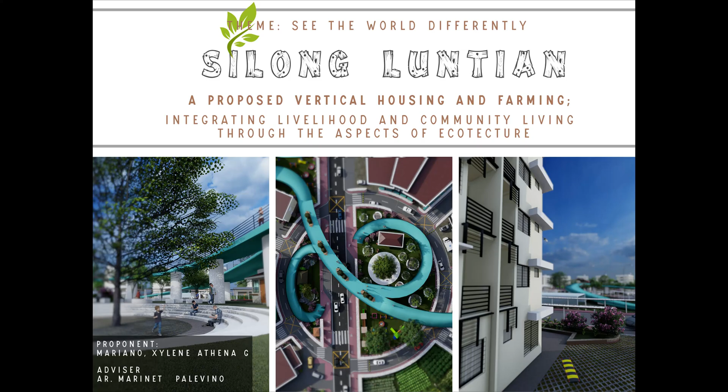Good day, I am Xylene Athena Mariano, here to talk about my proposal entitled Silong Luntian.

A proposed vertical housing and farming, integrating livelihood and community living through the aspects of ecotecture. The name itself, Silong, refers to the shade that safeguards anything underneath it, combined with the term Luntian, meaning the color green that is often associated with nature. When put together, these two words form Silong Luntian, a place that can provide people with their basic needs, all while being harmonious with nature.

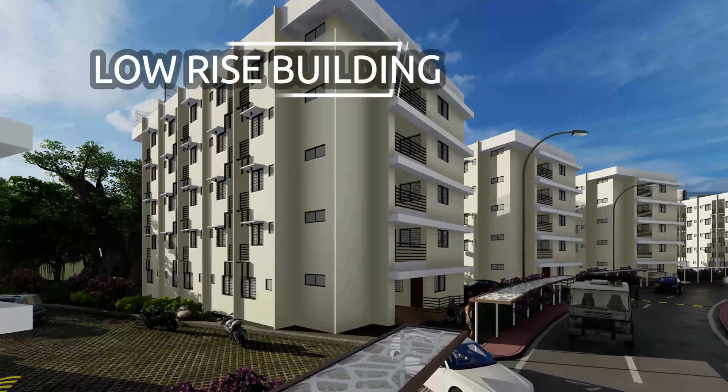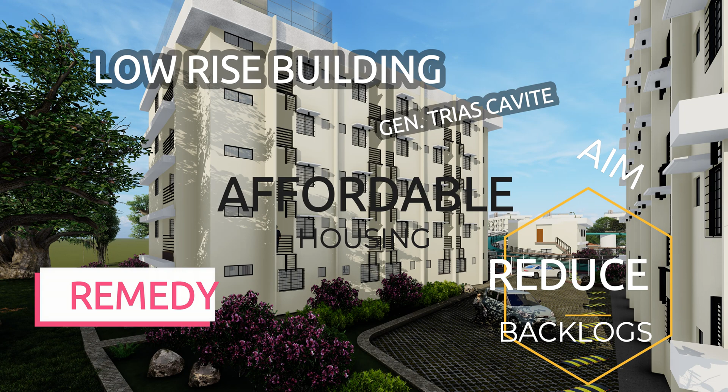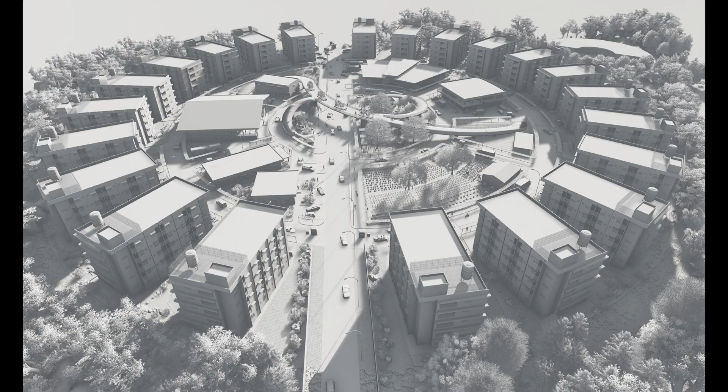To start off, the project is a low-rise building or LRB housing situated in General Trias, Cavite. The proposed project, with the aim of providing affordable housing, can also be seen as a remedy to reduce housing backlog since 25% of the total needs are accounted for the socialized housing segment according to the Board of Investments. This proposal intends to showcase green spaces such as parks and playground, a place for growing crops, and a marketplace to sell their goods, but most importantly, a residential living space to sustain people's housing needs.

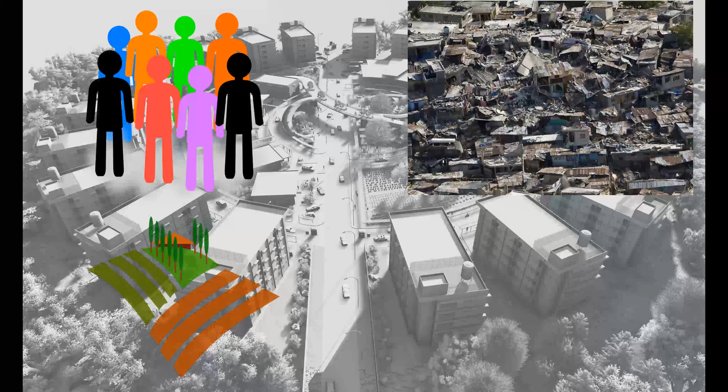Housing, as one of the basic needs, along with food and water, has been one of the most expressed needs and aspirations of the people, especially the urban poor and those belonging to the low-income group. These are some of the major existing problems: rapid population growth, presence of informal settlers, also the conversion of agricultural land, and the unmet housing needs.

As a solution, the project aims to achieve an architecture that gives back more than it takes, that defines home as both shelter and food, while providing quality and affordable housing. This project aims to provide not only the basic needs of the people, such as shelter and food, but it can also provide them jobs while increasing General Trias' economy.

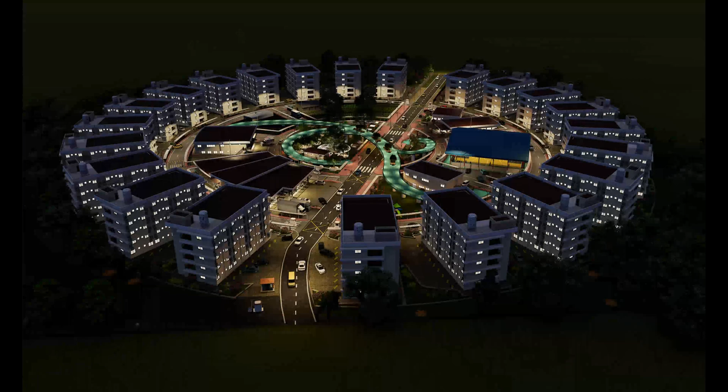To make this project achievable, we have NHA as the client that can support us financially. NHA is the sole national agency mandated to engage in housing production for low-income families. The project is said to be a residential facility that will build an ideal neighborhood and was proposed based on the project objectives and the needs of the client.

The scope includes providing a socialized housing that uses innovative architectural approach that are in line with the BP 220 IRR while optimizing the space and budget for the housing project, and also to provide community facilities as required by the NHA. When it comes to the limitations, the project will be focused on providing the housing needs of the lowest 30% of the urban population to avoid monopolizing.

The target market users are ISFs, or low-income families. Budget restrictions are also one of the limitations of the project.

The site is an 8.2-hectare land with a minor road along the middle part of the site. It is surrounded by residential areas on all sides. The minor road is an advantage for direct access to the site.

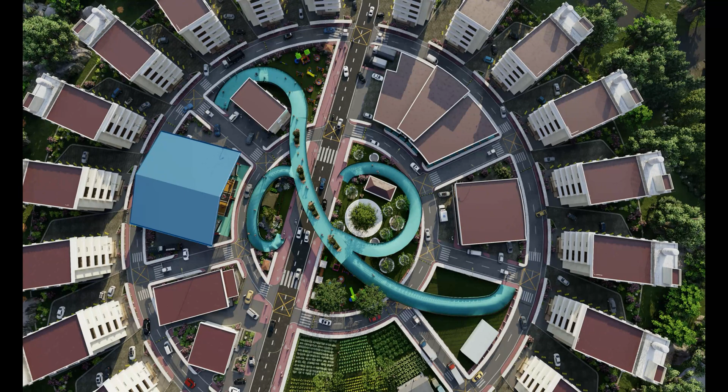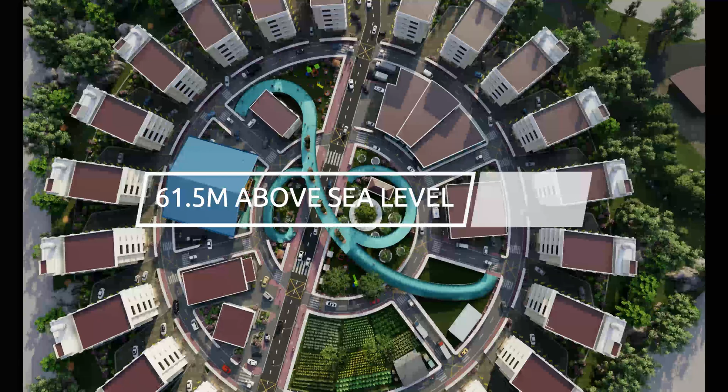Going to the SWOT analysis, these are the strengths. The site is located in a southern mixed-use development zone near the Golden Gate Business Park. High in elevation and no recorded flood. Bagong Calzada Road giving direct access on the site. Good type of soil. It also has drainage and a good climate, and it's also surrounded by residential areas.

About weaknesses, there is no scenic view, point-to-point tricycle route, noise and air pollution along the Bagong Calzada Road. Strategies are provisions of more suited vegetation for the noise pollution that serves as a buffer and for the scenic view.

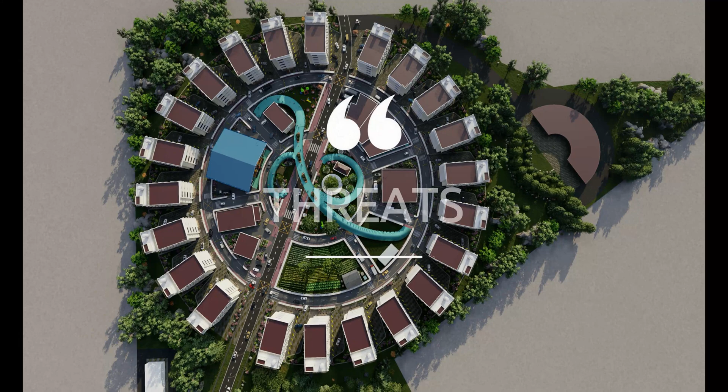Opportunities will bring livability to the market and business. Companies often choose new residential clusters for job opportunities. Good type of soil suitable for agricultural crops. For the threats, competitions from other subdivisions in the vicinity. Strategize a sustainable and innovative facility that is advantageous compared to other residential areas nearby.

These are the building systems applied in the project. For the environmental systems, we have passive cooling, daylighting, and rainwater harvesting. For the structural systems, flat slab construction, in which the absence of beams can reduce the building height, thus lowering the construction cost, all while having a higher ceiling, promoting good air circulation inside the units.

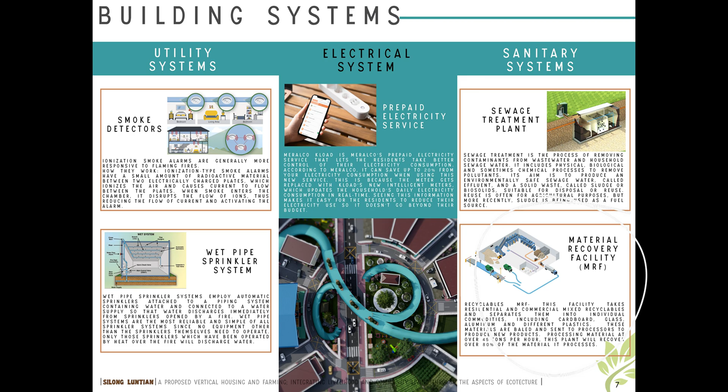For the utility system, smoke detectors and wet pipe sprinkler system is applied. For the electrical systems, prepaid electricity service. For the sanitary systems, sewage treatment plant and material recovery facility are included. For landscape systems, green pavement and urban farming.

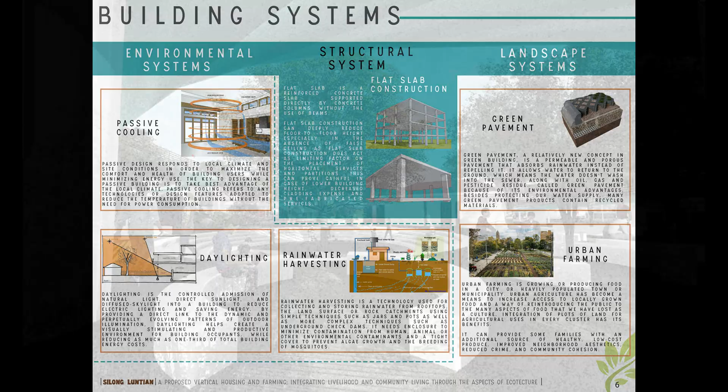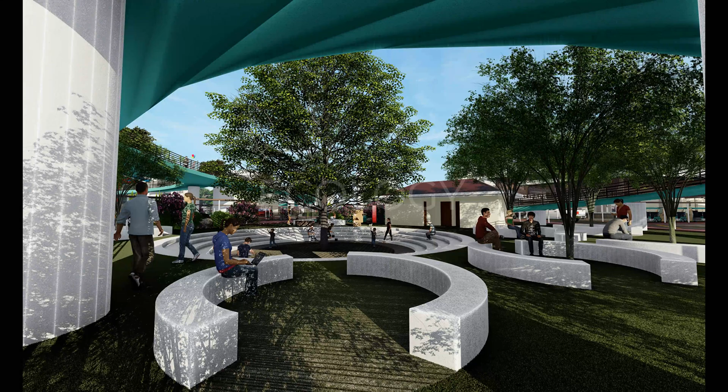The design concept used is ecotecture, based on the principle of not harming the environment. The word ecotecture is a combination of ecology, meaning the totality of relations between living organisms and their environment, and architecture. Ecotecture helps people and nature live harmoniously and support each other. Nature contributes to the beauty of architecture, and the architecture glorifies the majestic beauty of nature.

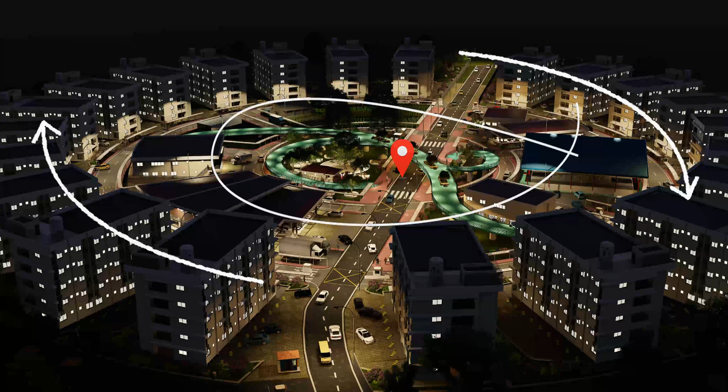The planning concept applied on the site is the idea of the neighborhood unit by Clarence Perry, based on the simple principle that one is planning for society. It promotes a community-centric lifestyle by putting the community center at the inner core, while the residential area surrounds it, giving equal access to all the neighborhood unit. It also promotes a walkable and safe community by having most of the necessities inside the community rather than going outside of it.

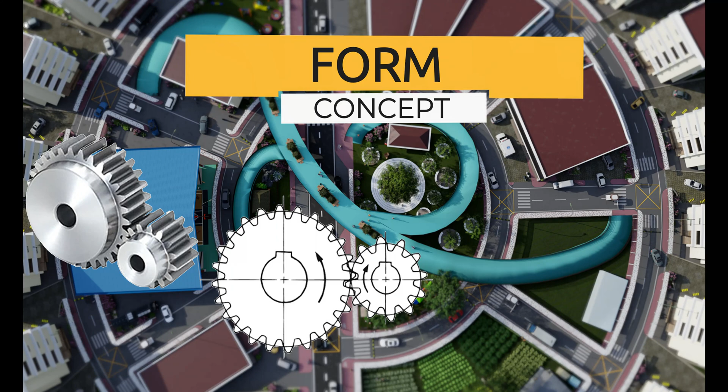The form concept applied is a gear. A gear cannot function alone, just like how everything inside the community is essential, and the people themselves are needed for it to operate, thus making the community sustainable.

The designer believes in the saying of Philip Cortelyou Johnson: 'All architecture is shelter. All great architecture is the design of space that contains, cuddles, exalts, or stimulates the person in that space.' To further explain, one can easily create a shelter, but to make it greater, it has to make you feel something, may it be excitement, comfort, or anything.

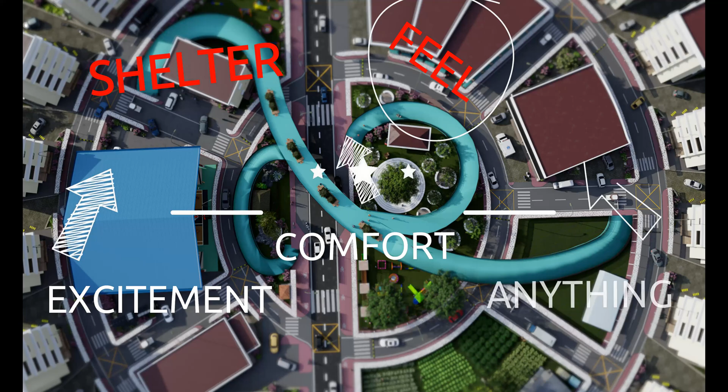Here are the set of design considerations applied.

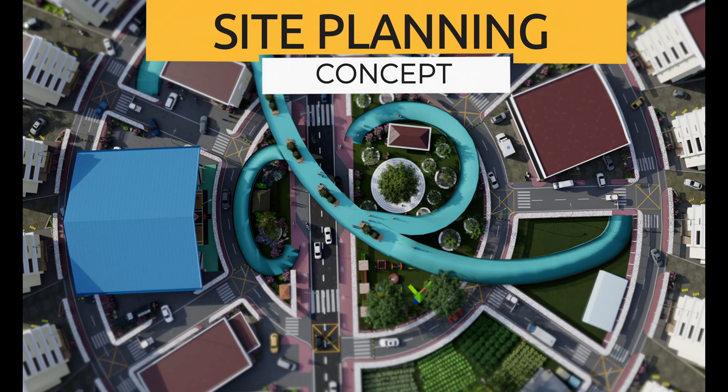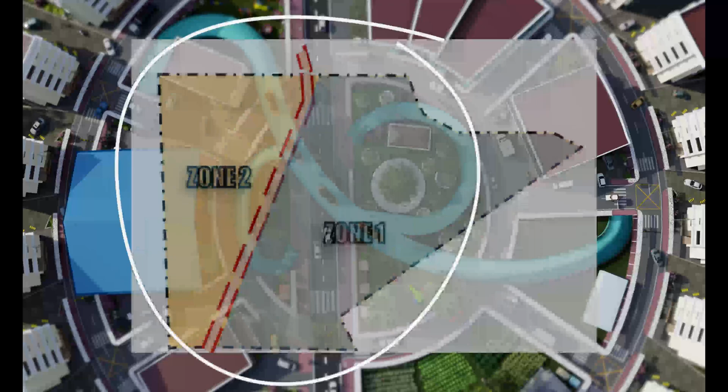These are the steps on how the project is planned on-site. First is considering the best orientation of the project from the behavior present in the site. Next is defining the main possible entry. After the possible entry, allocating the zoning and layout of major spaces.

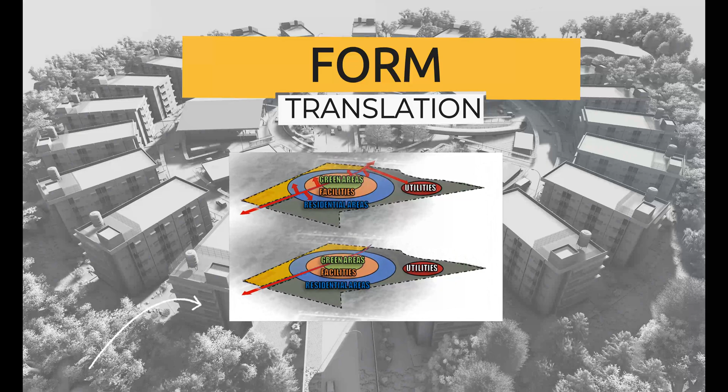Right after the analysis of the building, zones, and layout of major spaces, the massing of the project shall now be ready for translation. Form translation starts on layouting and allocating zones. Next is the allocation of pedestrian circulation, including road networks. Next is analyzing the sun and wind orientation.

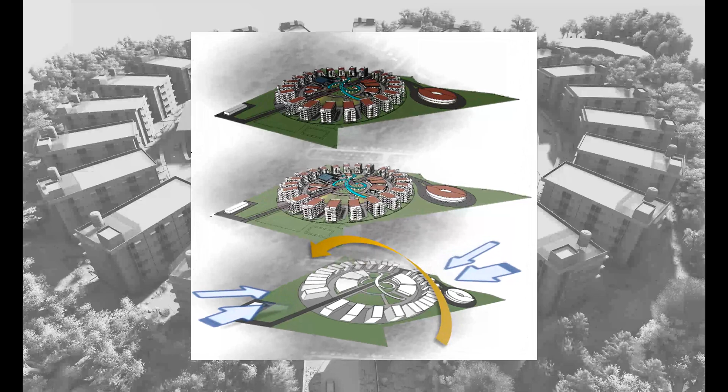After considering the circulation and the sun-wind orientation, the development phase is ready. Next is designing the entire site development, and lastly is the finished model, detailed site development.

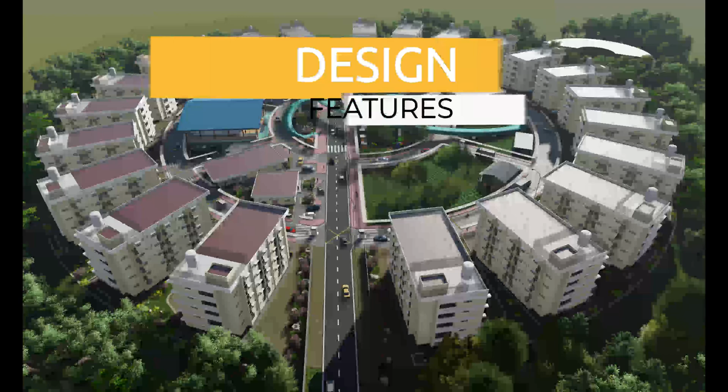These will be the design features of the project. Starting from the architectural character, the designer uses minimalism, which promotes clean geometric horizontal and vertical lines, uniformity, depth, and visual interest with asymmetry and color. Minimalist home exterior aims to create a visually uncomplicated home.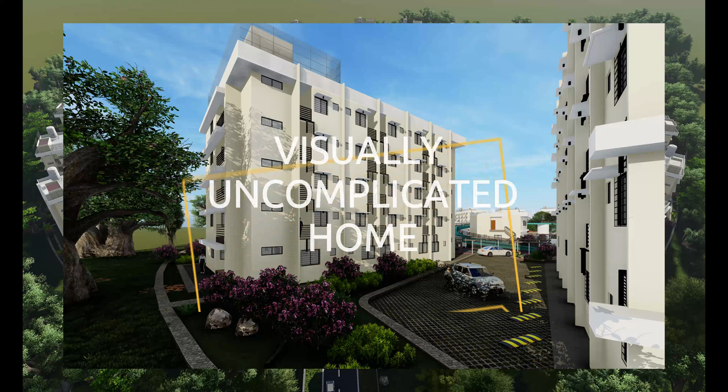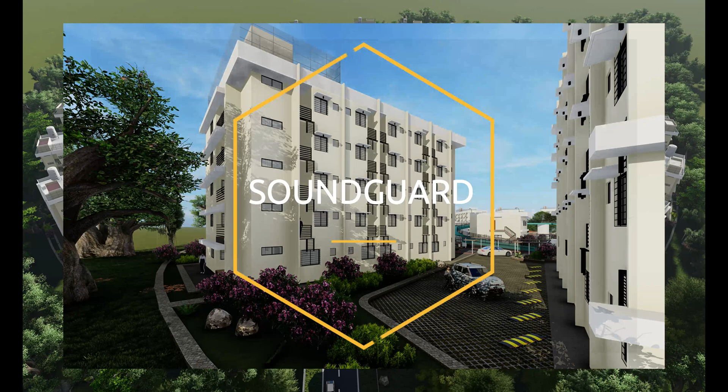For the innovations, the designer uses SoundGuard, the world's first soundproofing paint for the interior, specifically developed to reduce or eliminate sound transmission through walls and ceilings. It is scientifically proven to reduce sound transmission through interior walls by an average of 90%, making it the closest thing to soundproof paint that has ever been created.

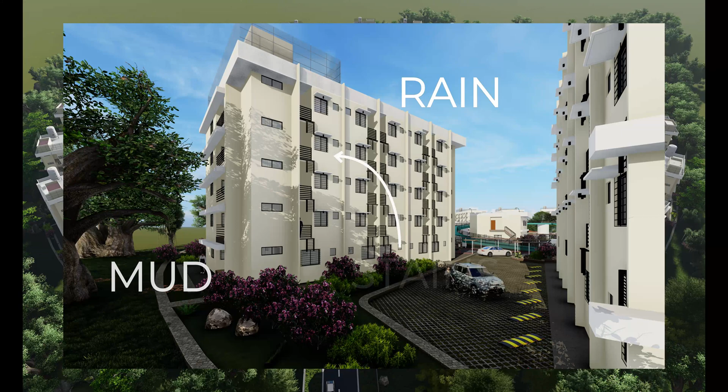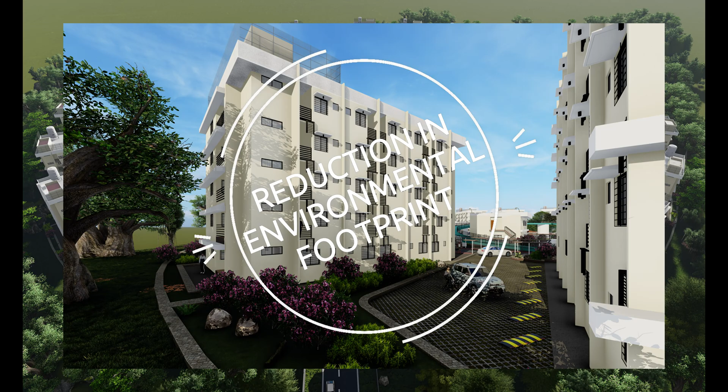On the exterior, the designer uses Weatherbond Solareflect. In essence, water beads form and roll off easily or simply do not stick at all on the coating. Owing to its extreme resistance to rain, mud, stains, and dirt, the coated surface will stay dry and clean. This new technology will help urban communities reduce their environmental footprint through a significant reduction in the energy and chemical detergents used in building maintenance.

Other innovations include grasscrete, rainwater harvesting, concrete recycling, and permeable pavement.

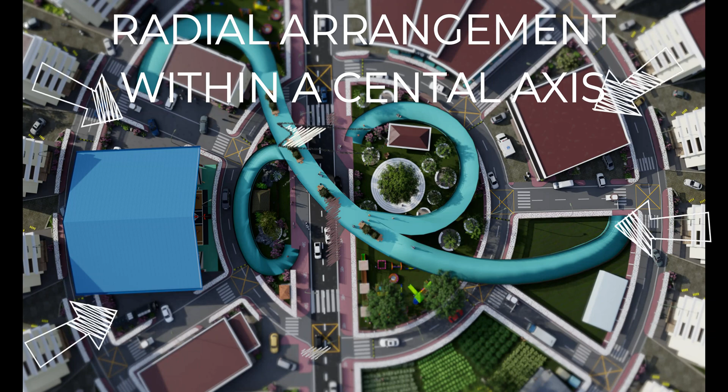The major highlights of the project are the radial arrangement and the sloping bridge. The radial arrangement of the residential buildings around a central axis and the symmetry makes the residents have equal access to every part of the community.

The sloping bridge, with a ratio of 1:12, connects the community to one another. It serves as pedestrian access while also giving the residents a place to exercise, jog, and ride a bicycle. Since it is a gradual slope, PWDs are also given equal opportunity. It promotes a safe and walkable community.

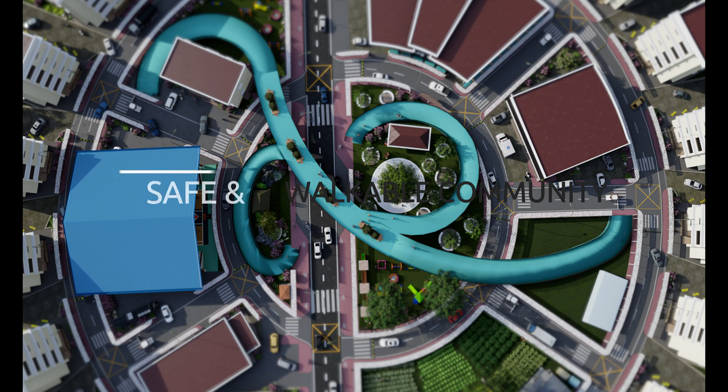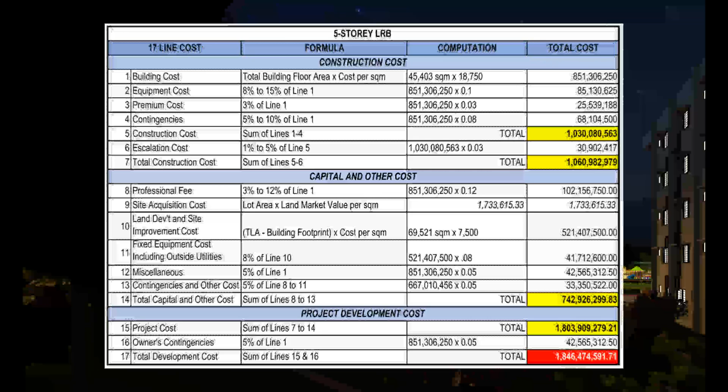With regards to project cost, following the 17-line cost generates a total of 1.8 billion pesos for the project cost.

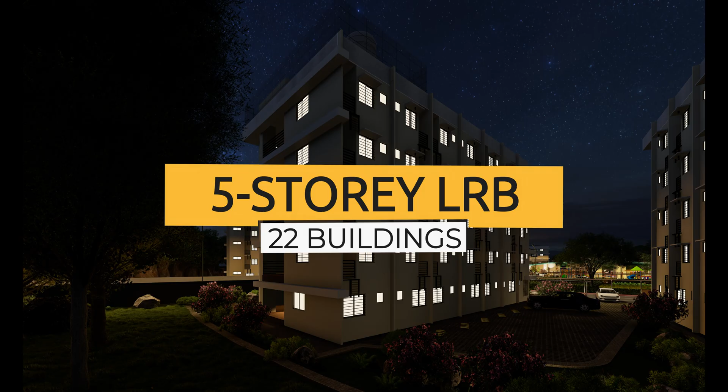Summary of the residential building plan: the project consists of 22 five-story LRB low-rise buildings, which is the maximum number of floors without an elevator according to BP 220. Ground floor consists of one PWD unit and the rest are Type A units. Second floor to fifth floor consist of Type A units, with 60 units for every LRB, having a total of 1,320 units overall, accommodating approximately 6,000 residents.

The PWD unit and Type A unit have enough ventilation. The designer provides two layouts on the Type A unit for visual representation depicting the flexibility of the space: one layout is one bedroom and the other is two bedrooms.

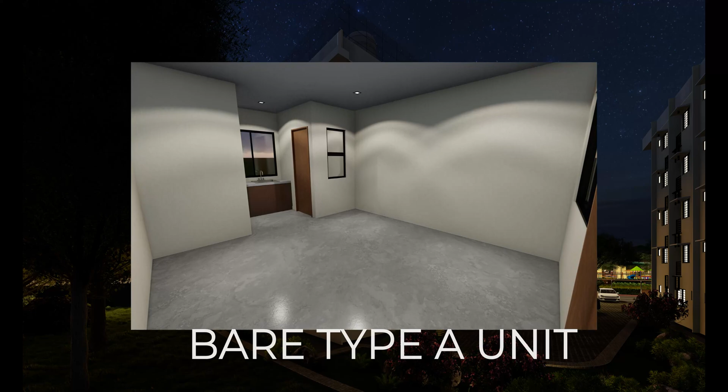As for the other areas and buildings provided, the designer refers to the standard community facilities based on land area provided by the NHA.